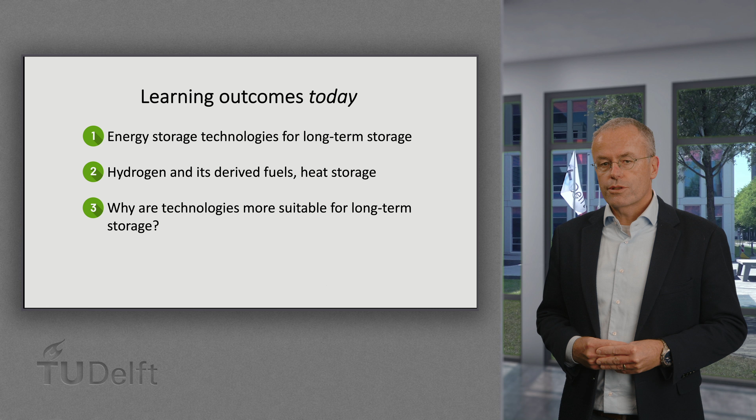Welcome to the fifth and last session of the energy storage module. We will hear today about storage technologies for long-term storage, hydrogen and its derived fuels, heat storage, and why these technologies are more suitable for long-term storage.

To go back to the energy storage densities for different systems, we can see interesting high energy density options here. The energy densities of compressed hydrogen, synthetic natural gas, liquid ammonia or artificial oils are indicated, and one can see they are ranging in size. These indicated fuels can be produced from renewable hydrogen and, for instance, nitrogen from air or carbon dioxide from a sustainable source. Then these fuels can be used for long-term storage. For the indicated fuels, we already know how they can be stored in suitable ways.

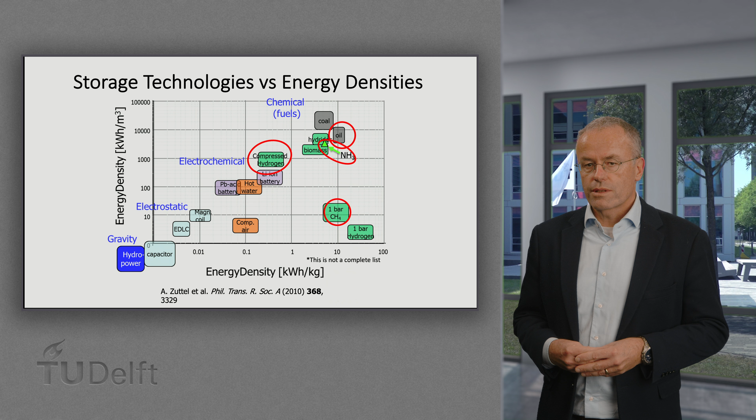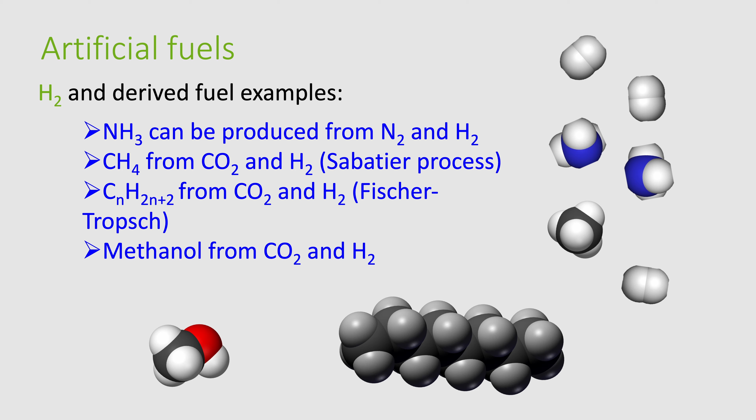Hydrogen and derived fuel examples. These artificial fuels can be produced from renewable hydrogen and nitrogen or carbon dioxide, as we also saw in storage session 2, for making the industrial energy use renewable. Apart from these thermochemical routes, also electrochemical routes are being researched.

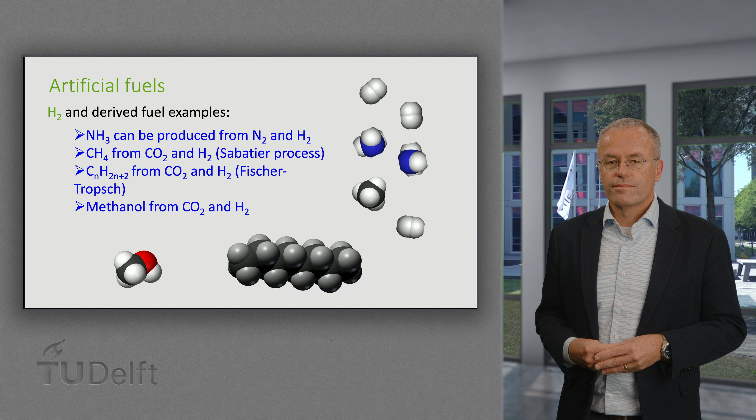Here, a basic electrochemical cell is shown in which at the negative electrode hydrogen is produced from H2O, and at the positive electrode oxygen is produced. The OH- that is produced at the negative electrode travels to the positive electrode. It is called alkaline electrolysis because the electrolyte is an alkaline solution. The overall reaction is water being split into hydrogen and oxygen. There is a membrane separating the hydrogen and the oxygen.

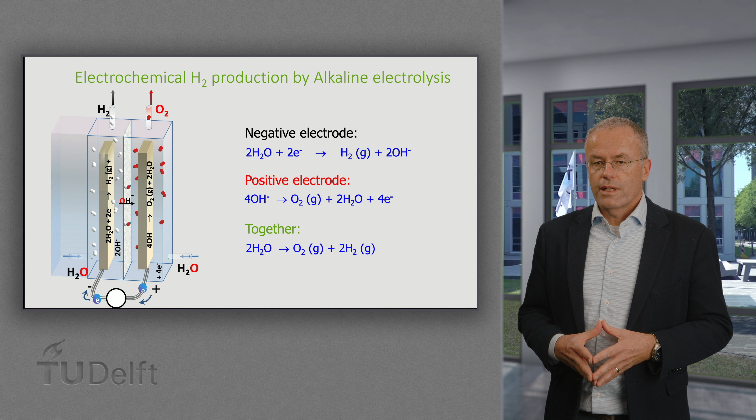On the picture, one sees an alkaline electrolyzer stack that has many cells of the previous slides in series. Some general alkaline electrolysis characteristics are listed here. It's used at scales from megawatts up to several hundreds of megawatts. It's considered to be the lowest cost electrolysis. It can use nickel-based electrodes and potassium hydroxide in water as an electrolyte. It's very durable when running constantly. Single cells are stacked in series, and the technique still actually needs to learn how to work with intermittency.

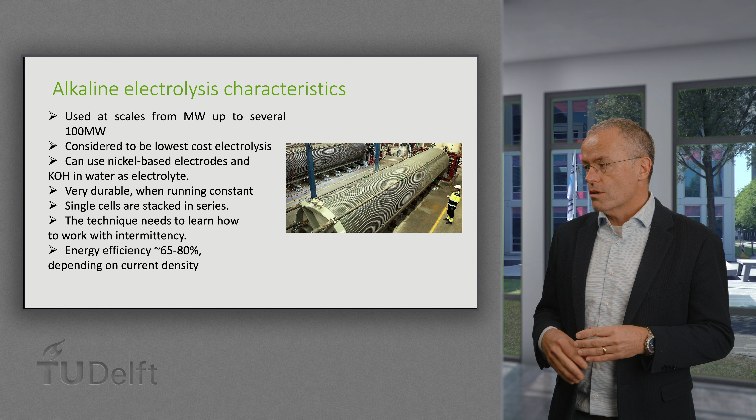The energy efficiency can be 65 to 80%, depending on the current density that is used. And these electrolyzers are run at high currents normally to make the best use of the installation, and that results in efficiencies that are lower than when one would use them at lower currents. This is a picture of a large-scale alkaline electrolyzer as it was used until 1991 in Norway.

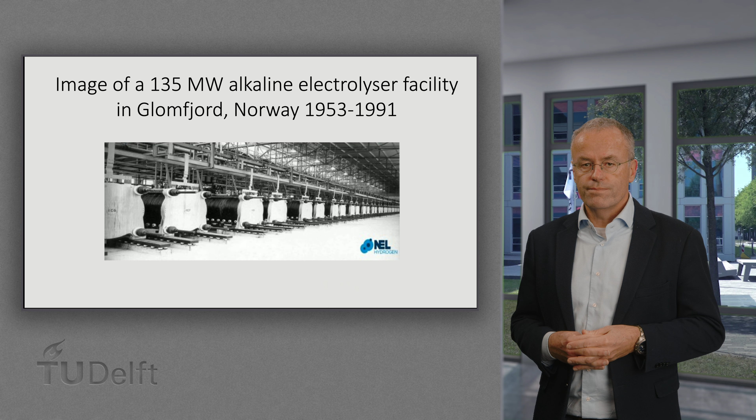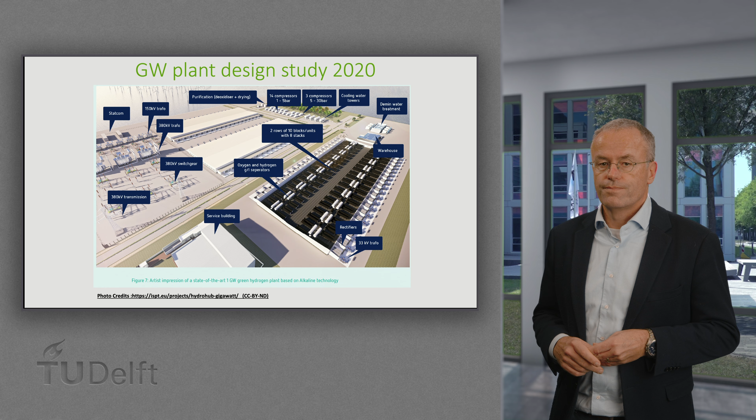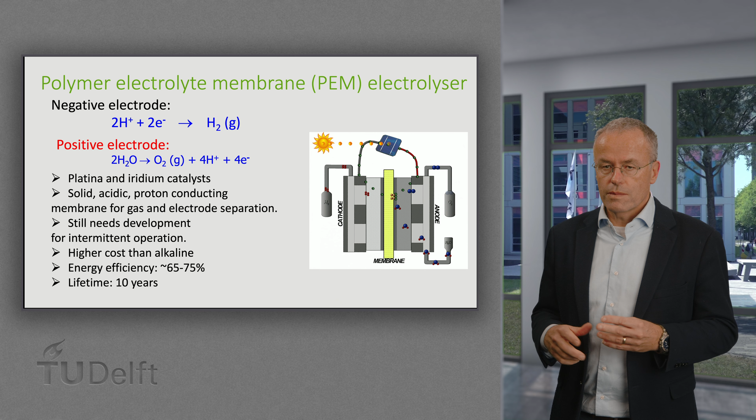Because of the acidity, one can only work with noble metal, platinum and iridium-based catalysts. The membrane also separates the gases. When using PEM electrolyzers as storage means for intermittent electricity, still some further developments are required. It is considered more costly than alkaline electrolyzers, and the energy efficiency ranges from 65 to 75%, depending on how much current is fed to the system.

In Delft, we developed an integrated battery and electrolyzer on the basis of an alkaline nickel-iron battery. The basic notion is that in a renewables-based energy system, one requires large-scale short-term storage in batteries next to long-term fuel storage coming from hydrogen out of water electrolysis. This integrated battery and electrolyzer has both aspects with only one set of materials for the electrodes and the systems around it, such as the power electronics and the balance of plant. So that provides a material saving. Also, using lower currents does not only increase the number of cells, but it makes the battery capacity and the energy efficiencies higher.

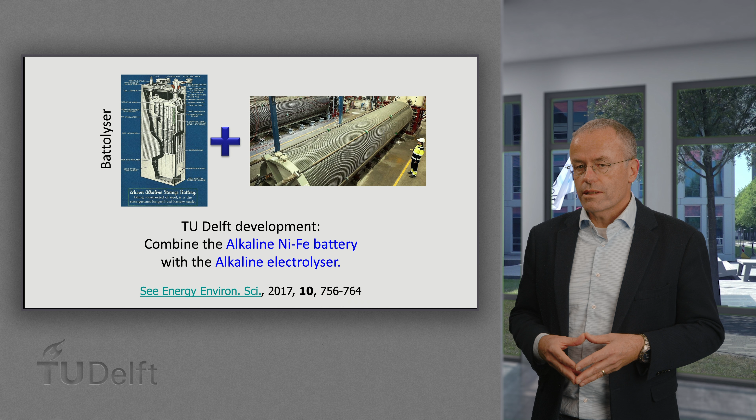Inside the cell, it looks very much like an alkaline electrolyzer. The difference is though that there are now battery-type electrodes that are charged first with the indicated electrochemical reactions involving iron and nickel-based materials. When the electrodes are fully charged, the iron and the nickel oxyhydroxide that are formed act as the catalysts that split water into hydrogen and oxygen. When there is a lack of electricity, the battery electrodes can be discharged to provide electricity. So this can work with intermittent renewable electricity, at one moment as a battery and another moment as an electrolyzer. And it uses no noble metal catalysts.

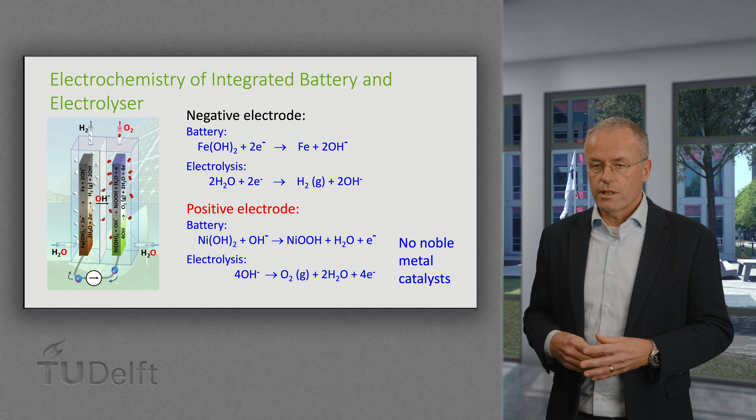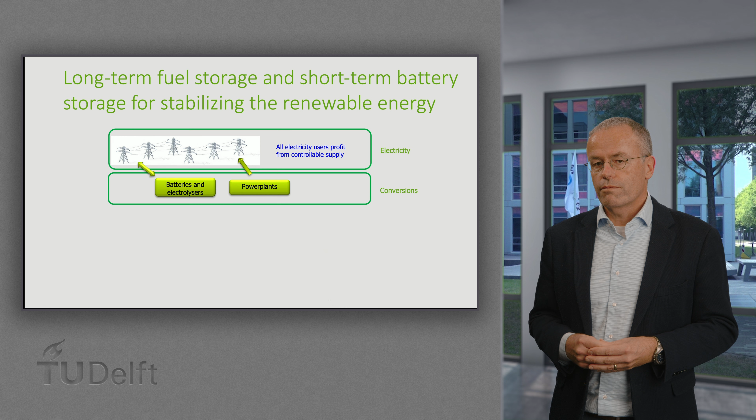Let us now look to a whole energy system then. The renewable electricity from the grids will be coming from intermittent sources. When there is too much electricity, it can be stored in batteries, and when they are full, converted to hydrogen. Here, ammonia is used as example for hydrogen storage because this molecule does not need a carbon source and it can be stored as a liquid.

When there is too little electricity, first batteries can be discharged, and when they are empty, the stored fuel can be used in gas turbine power plants to produce electricity. The conversion of ammonia to hydrogen, or cracking, may be done before that. The hydrogen is also used as industrial feedstock. In this way, both the electricity supply may be stabilized on short and long timescales, and also the chemical feedstock supply can be stabilized.

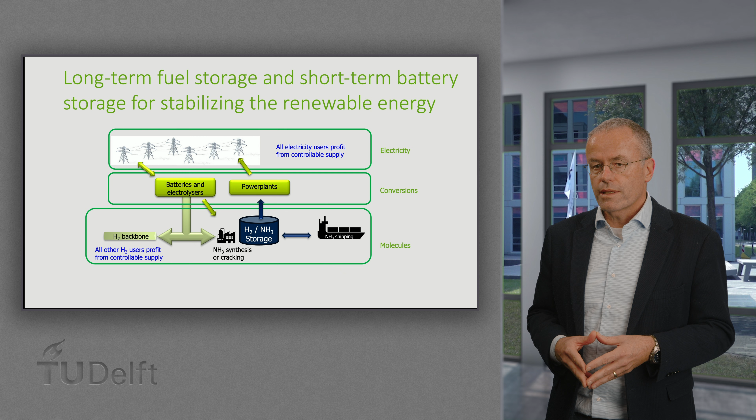Sustainable ammonia, NH3, as large-scale hydrogen storage, what is that good for? Well, let's look at this list of characteristics. It can be produced from green hydrogen and nitrogen in air. Air is 78% nitrogen, so it's easy to obtain. Much easier than, for instance, carbon dioxide with its low concentration in air. Ammonia manufacturing uses iron as a catalyst and as pressure containers. That is not an expensive material.

Today there are storage containers of liquid ammonia of 100,000 tons. With its high energy density, that means such a 100,000 ton container contains 625 gigawatt hours. One can therefore envisage terawatt hours of storage on industrial sites. Ammonia itself can be used as a fuel in a gas turbine for electricity generation. Next to that, it is also an agricultural fertilizer and chemical feedstock and hydrogen storage.

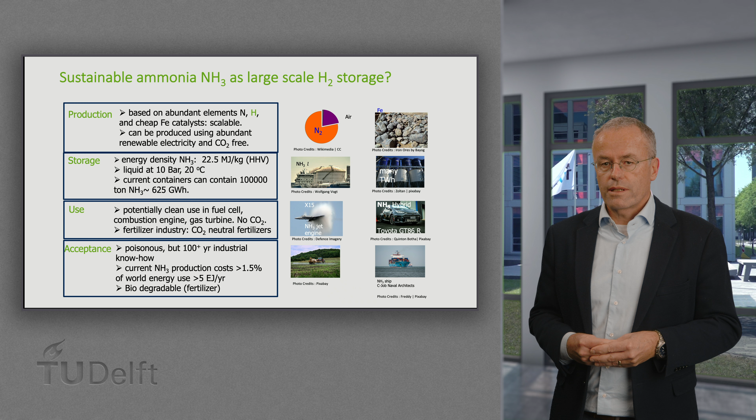An important remark, though, is that ammonia itself is poisonous, so it needs to be handled with great care. However, there's 100 plus years of industrial know-how on an operational scale that is already very large. The current energy use for ammonia production is about 1.5% of the world's energy use. In case of a spill, it is biodegradable as it is a fertilizer. That is different for, for instance, methanol, which is equally poisonous and can reduce plant growth.

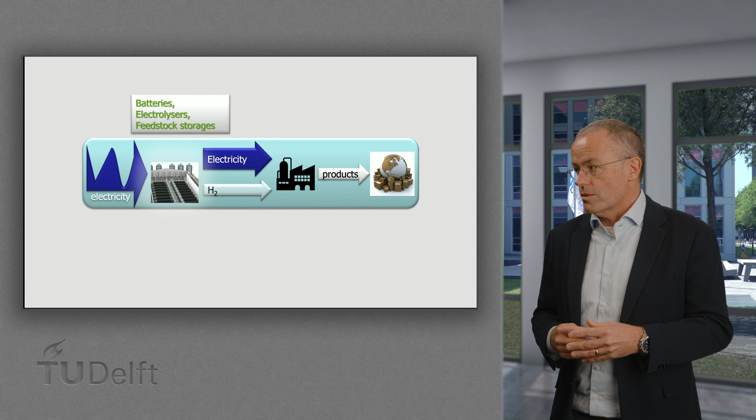Note that storing on these different scales leads to different total energy volumes. The batteries are going towards multiple gigawatt-hour scales for one site. They will be cycled many times a year, so the electricity throughput can be hundreds of times higher. The fuels go to larger unit sizes because they are cycled only maybe once a year. Obviously, the system is very much under development.

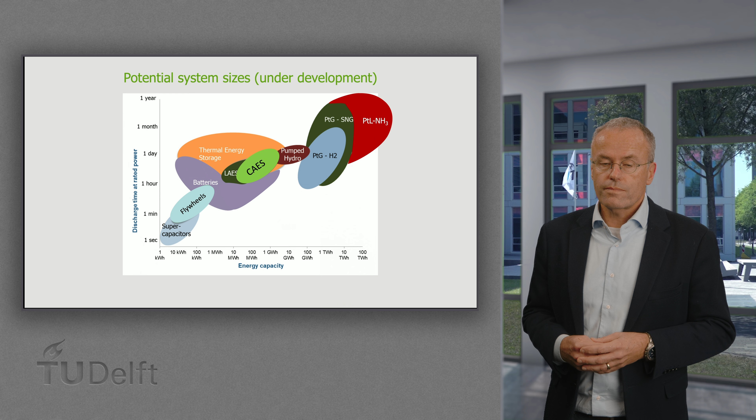The previous slide also includes thermal storage. An important example is the air conditioning in buildings, which is cooled in summer by cold water from underground layers. The resulting heated water is stored in the underground for use in winter, when the still warm water is used to heat the buildings again. So that is seasonal energy storage.

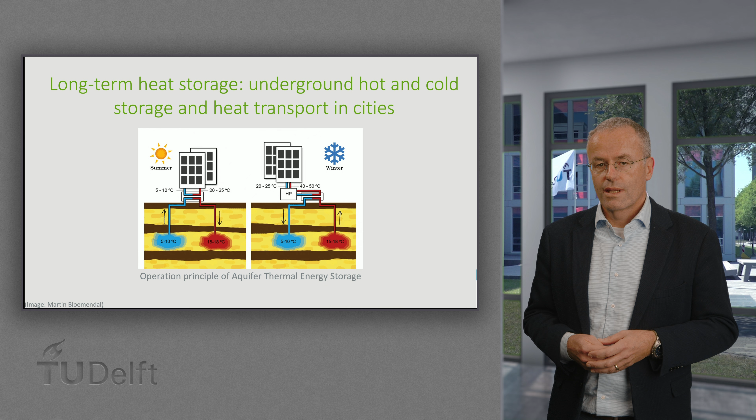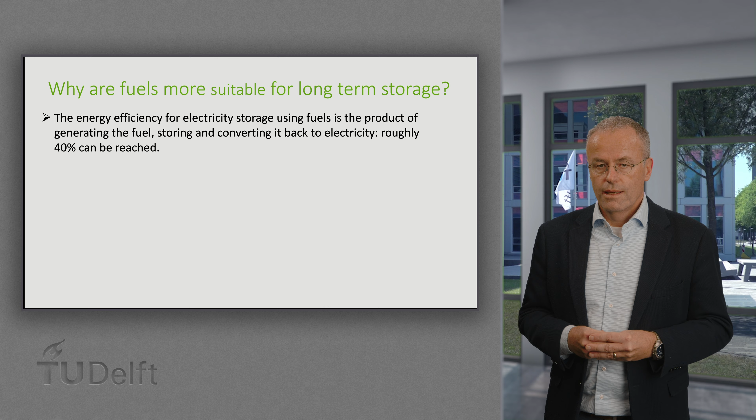Why are fuels more suitable for long-term storage, one may ask? The energy efficiency for electricity storage using fuels is unfortunately not very high. It is the product of generating the fuel, storing it, and converting it back to electricity. Roughly 40% can be reached. Although this efficiency is low compared to batteries, it has the advantage that the fuel molecules can be stored relatively cheaply and at the required very large scales. Batteries are only economical to a size that they can often be cycled on a short time scale.

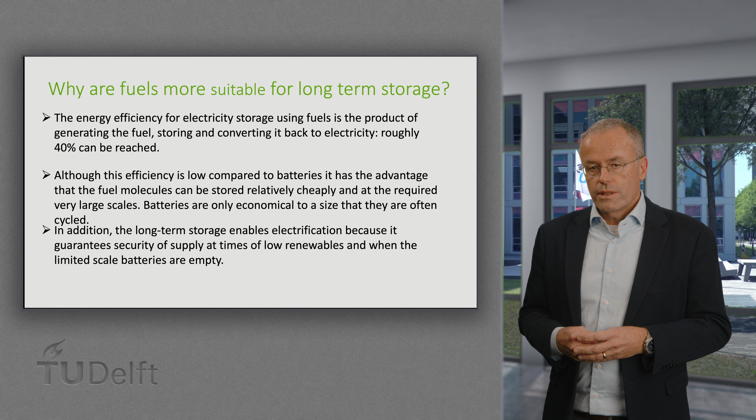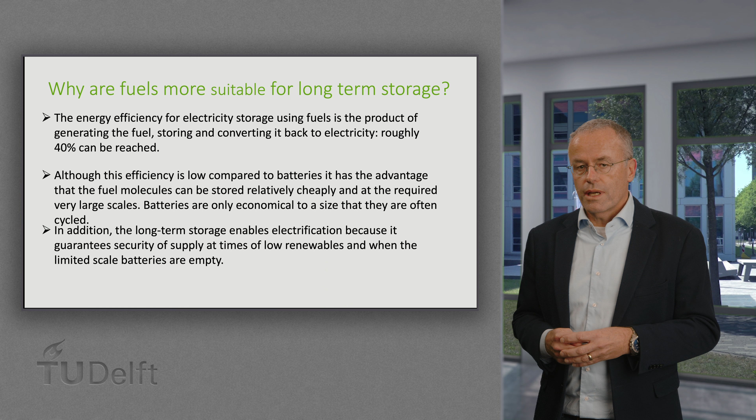In addition, the long-term storage enables electrification because it guarantees security of supply at times of low renewables and when the limited scale batteries are empty. So whatever society does, it needs security of supply, which means long-term storage backup power for when the sun and wind have too limited output. This concludes the Energy Storage Technologies module.